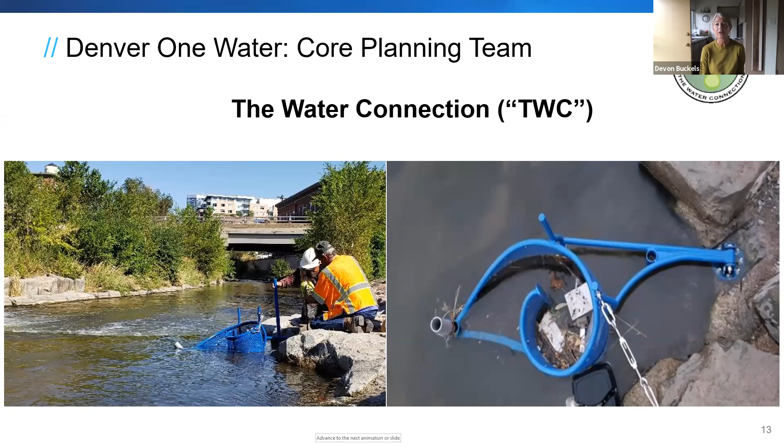Hi everyone, my name's Ty Boreski, and I'm a senior planner at Denver Water. I also want to briefly introduce my colleagues participating in this: Abby Antelovich and Jeff Terrell. Denver Water is the oldest and largest water utility in Colorado.

We provide drinking, recycled, and raw water to over 1.5 million people in the metro area. As an organization, we are always seeking ways to most efficiently use and protect our water supplies, and when it comes to One Water, we want to lead by example. Recently, we've redeveloped our campus, integrating One Water elements such as a decentralized blackwater system, rainwater harvesting, and drought-tolerant, less water-intensive landscaping. We're grateful to be part of this regional initiative with such great partners. Thank you.

And on the next slide, I think we have Brandy from Metro Wastewater.

Hi everyone, I'm Brandy DeLange from Metro Wastewater. Metro is obviously a really critical part of the water cycle here, and we provide wastewater treatment to over 60 municipalities within our Denver metro area, so that's about 2 million people being served. We really see that the One Water project is in alignment with our strategic vision.

And also us being an innovative leader in the wastewater treatment industry, we're very grateful to be a part of this. We see that this really is part of the value and collaborative relationships that we have with all of our stakeholders and partners throughout the water cycle.

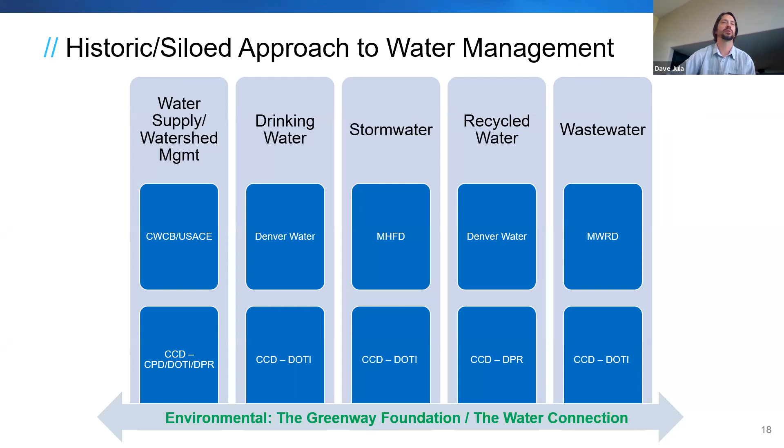So how does One Water look in the Denver metro area, and specifically the city and county of Denver? We talked about all the players. I'll just go around our nice little graphic here. Denver is responsible for stormwater and floodplain management.

Primarily, we do stormwater and sanitary infrastructure responsibilities, the pipes in the streets that you don't see unless they're backed up. And then Metro Wastewater treats our wastewater, the water that goes down your taps and flushes down your toilet.

And then we have Mile High Flood District, which assists the city and other jurisdictions within the region for stormwater and floodplain management. And Denver Water supplies us our potable water and ensures that we have a sustainable water supply.

So these are all the different players that are working together. And then we have people like the Greenway Foundation and the Water Connection that are advocating more regionally and holistically across the area. And so this is how we work in the city.

And then one thing that I've learned, and anybody who has been working with One Water concepts and frameworks and the theory in general, is a lot of people have different definitions of One Water. So we did come up with our own. And this gives you an idea of some of the things, I'm not going to read to you.

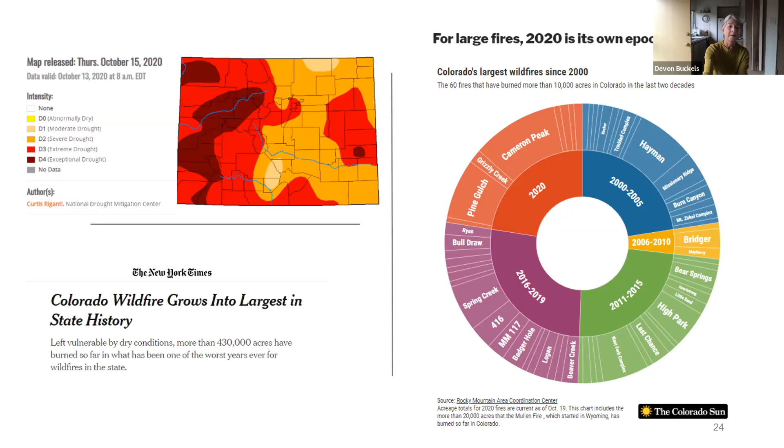We put together a list of some One Water goals, and these are just for context. This isn't necessarily as they're going to appear in the plan. But one of the things we're trying to accomplish is to elevate water's visibility and standing relative to other critical resource areas. Water sometimes is sort of invisible, and as long as it functions, then nobody really talks about it or thinks about it. So we're trying to elevate the conversation around water and watersheds.

We also feel it's important to reduce negative impacts from decisions made in silos, as Dave mentioned. We intend to strengthen relationships for holistic and multi-benefit solutions to water challenges. And this is a great opportunity with all of these different organizations coming together.

We can talk about pivoting from business as usual. It's no longer okay to just say, well, we're going to do it this way because that's how we've always done it. So we're really going to push the envelope a little bit here and challenge each other to think a little differently, and perhaps think as if there is no box in the room.

We also want to support each other and support opportunities for a water resilient future. And through all of that, a goal would be to improve urban livability, equity, and social justice. Because after all, water is not only fundamental, water really is life.

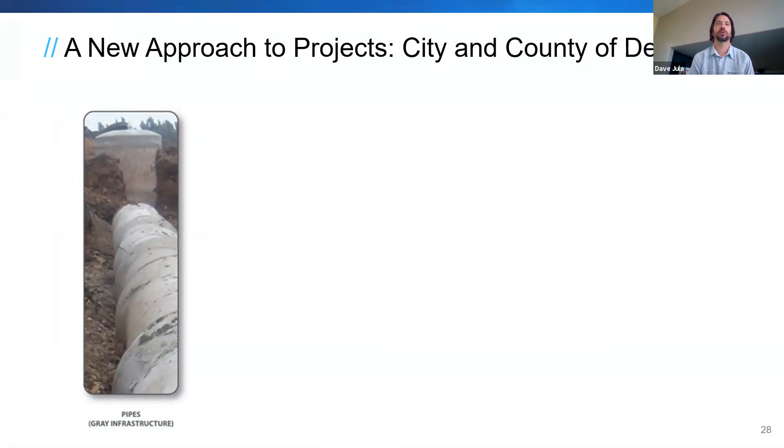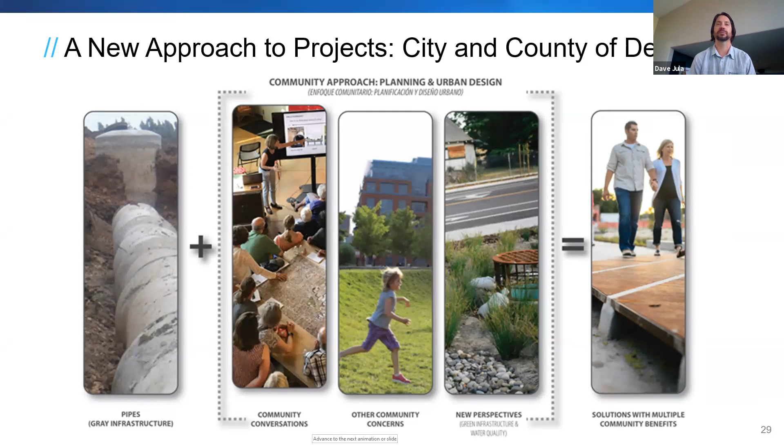Traditionally, at the city, we're really good at focusing on the gray infrastructure. And from a water perspective, that meant pipes, big pipes to convey stormwater from our neighborhoods to our waterways. However, in the last few years, we've really shifted that focus to look more holistically at our projects, work with the community, understand their needs, listen to what they want in their neighborhood, and look for opportunities to introduce green infrastructure to improve water quality, not just manage big storm events. All those things result in multi-benefits to the community we've been talking about. This is really the new way of approaching work.

So how do you specifically fit into this process? We have our core planning team who you've met. We have to brief our executive leadership at our respective agencies. We also have an advisory group, the One Water Advisory Group, made up of industry experts across the board to help us vet ideas and identify challenges early on and potential solutions. But this is your opportunity to engage with us and hear from you on what you want to see in a One Water plan moving forward.

This is the first touch point we're having with you, so we're doing a lot of introductory work here on the concepts, but we will be coming back to you more times, later next month and early next year, as we complete the plan, hopefully by March of next year.

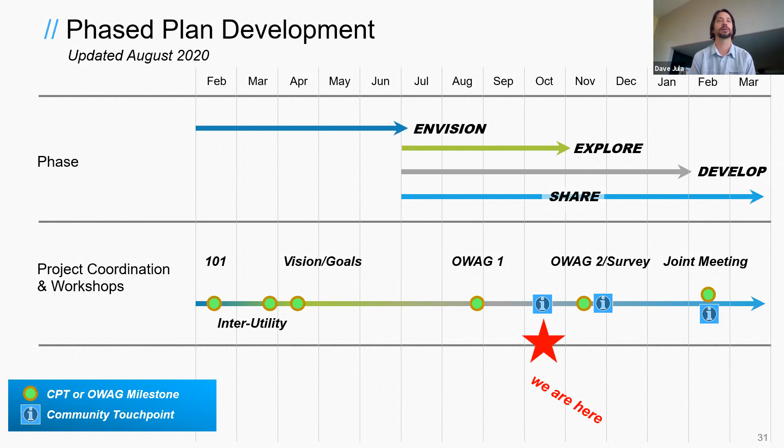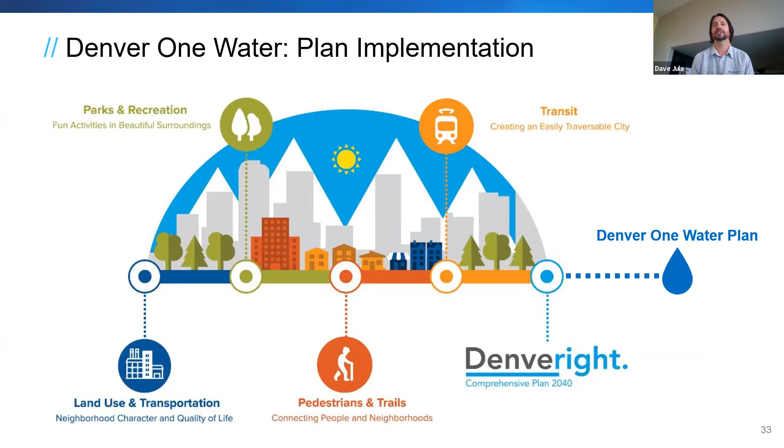Now I'm going to hand it back to Miles for our next question. Thanks, Dave, that's a really good summary on where we've been, where we are, and where we're going, and that this is just one of the first opportunities to get your feedback on what's important. Where does the community see opportunities? Where does the community see challenges? And what questions do you have?

Alex, I know you put it out there on chat - any questions coming in yet? No questions that have come in via chat, and I'm going to take a quick look. I don't see any hands raised yet. Perfect, we'll give you all just a couple more minutes if you have any other chats.

Quick reminder, this is discussion zone number two of five. I'm sure you're all holding your questions for the end - we'll have a final thought and Q&A at the end as well. You probably want to get to the really fun stuff on how do we make this real, and what does a good One Water project look like? What are the criteria that make a project a candidate, and what does that mean for the community, you all at the neighborhood level or even the citywide level, the state or the regional level? So unless, Alex, I've killed enough time to get some questions...

One question is from Christy Wiseman asking, how is equity being integrated into Denver's One Water planning process? The pandemic has highlighted longstanding inequities in access to affordable, reliable, safe drinking water, and in underserved communities not being prioritized for green infrastructure projects. So I think the key question here is how is equity being integrated into Denver One Water's planning process?

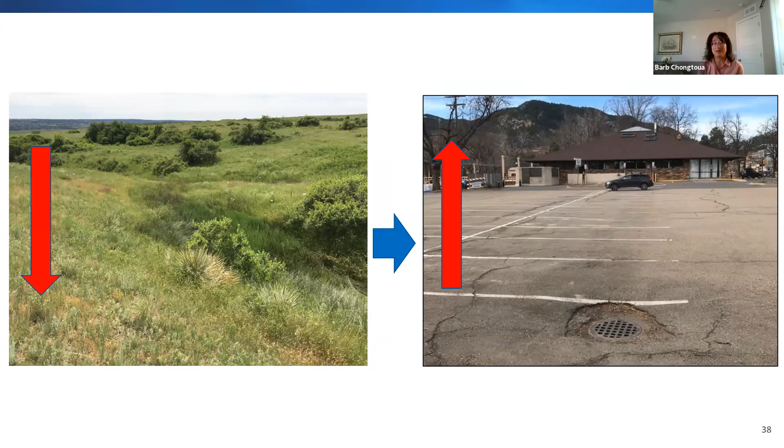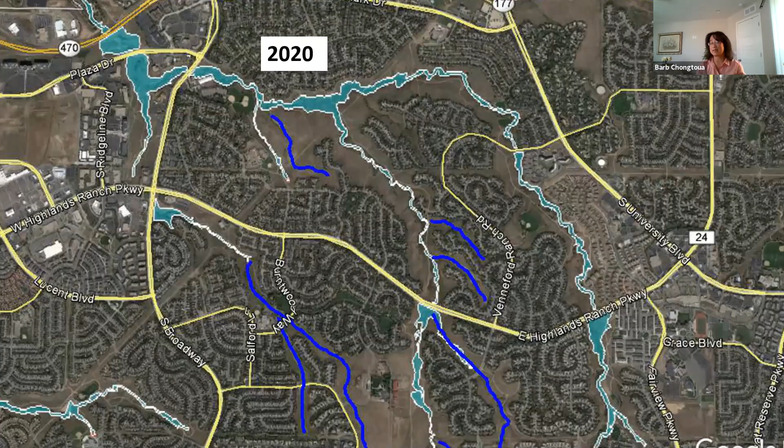Well, you take another area in the metro area shown in this next slide in 1937, and it's very similar to the Denver Tech Center. Keep going to the next slide, and you'll see there's a slight difference in how this developed. This is what it looks like today, and you can move to the next slide for eyes on the ground of what it looks like. You can see here that there was a deliberate effort with development actually embracing these green spaces.

This is an example of what makes a good One Water project. It works for development and it works for everything else we've been talking about all along. Next slide, please.

These really minor changes, simple changes like adding green spaces back in or vegetation, even simply with a parking lot, have a huge impact on its use and benefit to us, and its benefit to wildlife. We might even challenge ourselves to incorporate these simple changes, as you can see on the next slide, to a larger scale, a city scale, say Denver.

But as a good One Water project, why don't we take this opportunity to incorporate good vegetation and good topography in the overbank area so that we now have space for people, but also spaces for wildlife and vegetation. Why not take it one more step as a good One Water project and use the space to also cleanse that water running from the streets and buildings before it gets into the river.

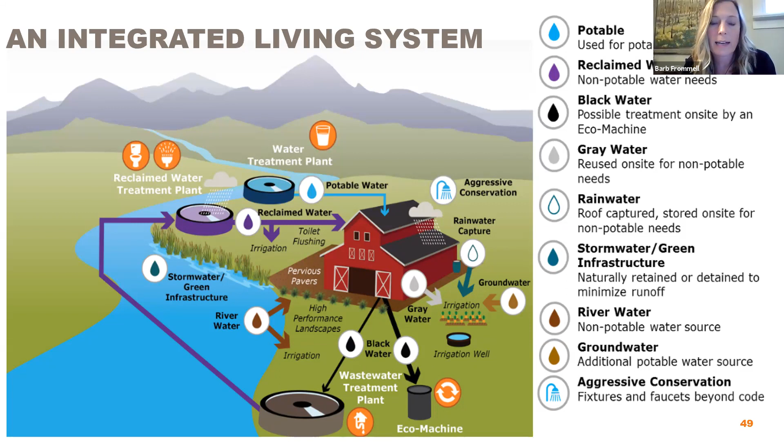We were challenged by our partners, and I'll call out John Zapien specifically, a longtime Globeville resident and National Western Center Authority board member, who challenged us to turn our liabilities into assets. This is a great story and example of how we've been able to do that.

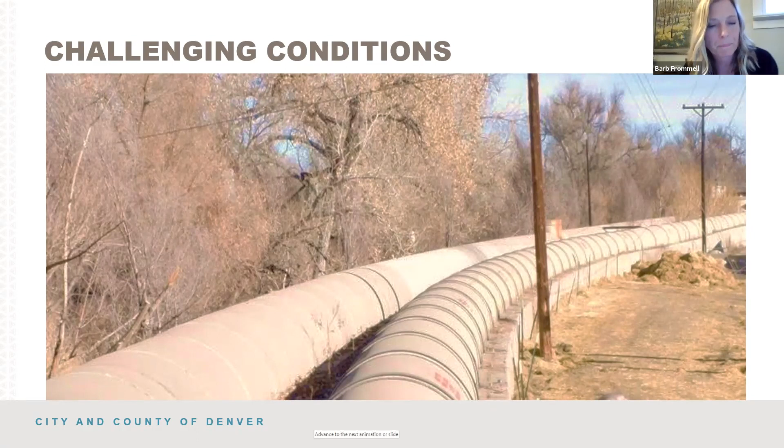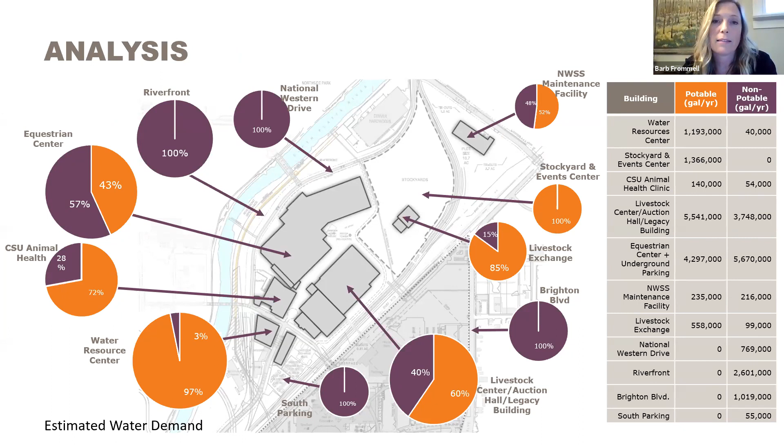The other piece that contributed to our One Water process was analysis. There was a lot of work that went into collaborating on data and projections, such as water demand projections. CSU and Denver Water did a lot of this work, and we've been very appreciative of that. It allowed us to really look at the realities of delivering some of the different solutions to the campus and look at patterns in the data that would help us hone in on what the right solutions are.

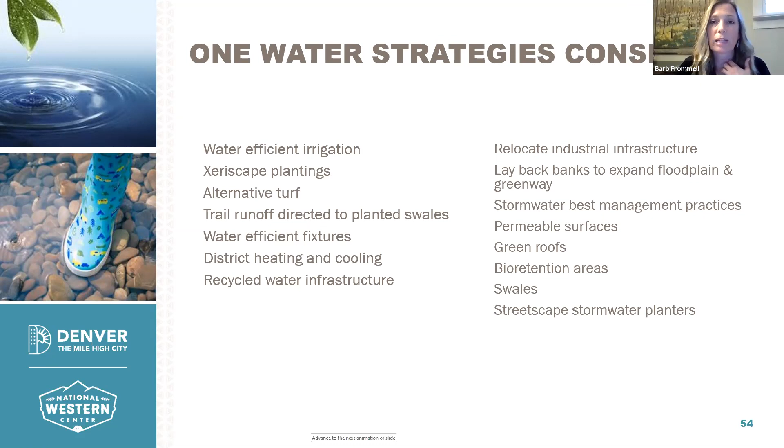I'm going to focus on two areas where I think we've been really successful, and that is the district heating and cooling, and the greenway along the riverfront.

District heating and cooling is a different way of heating and cooling your buildings. Typically, each building would have its heating and cooling as an individual structure, sourced from natural gas. With district heating and cooling, you take a much more efficient approach where you consolidate all of the equipment into a central utility plant.

We source our heating and cooling from the thermal energy in the wastewater in the Delgany pipeline. This has tremendous energy benefits in terms of greenhouse gas reductions on campus, but what we don't talk about as much is the water benefits. By reducing the temperature of the wastewater in the Delgany pipeline, we help Metro Wastewater reduce the temperature of their effluent that goes into the South Platte River. So simply by heating and cooling our buildings this way, we have ecosystem benefits on the South Platte River, a connection you wouldn't normally make.

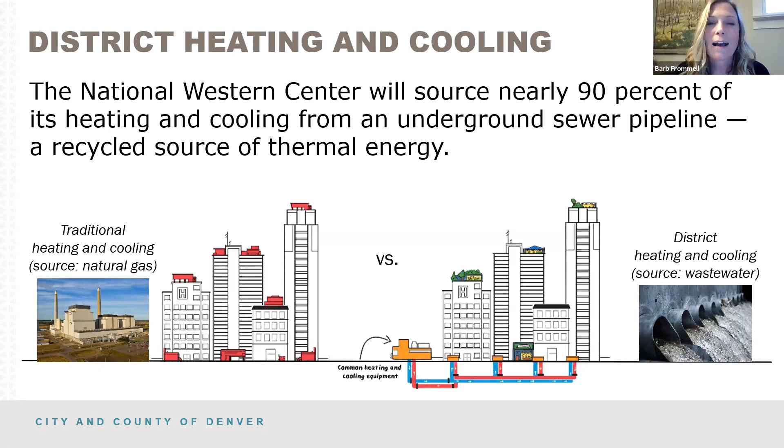The district energy system also allows us to conserve water on the campus. In traditional heating and cooling, every building would have its own cooling towers, and cooling towers in commercial and industrial buildings consume 20 to 30% of a facility's total water use, making them the largest use of water in these buildings, which is largely what we have on campus. In district heating and cooling, those cooling towers aren't located in the buildings; they're centralized in the central utility plant, which is a much more efficient way to heat and cool the buildings.

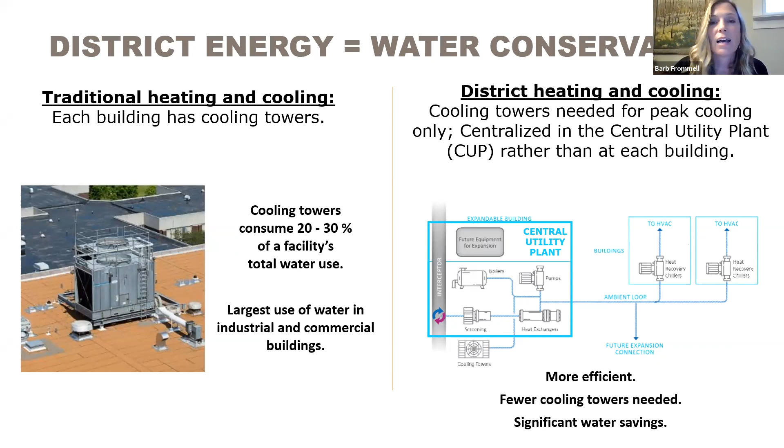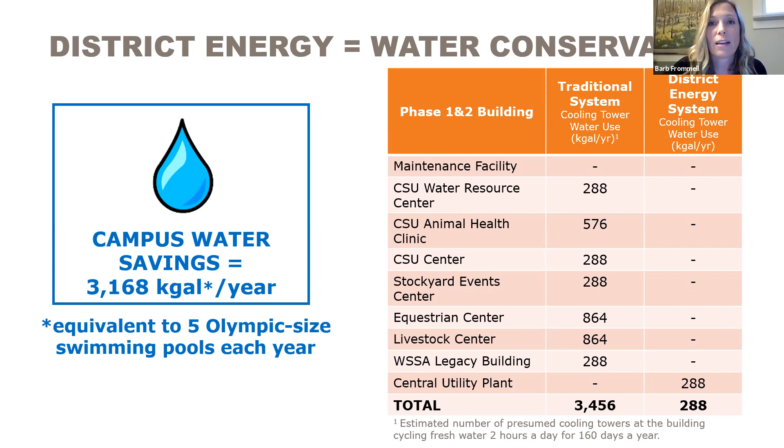We need fewer cooling towers, and we have significant water savings. We've calculated that savings at over 3,000 kilogallons per year, equivalent to 5 Olympic-sized swimming pools each year, simply by taking a district energy approach to heating and cooling our buildings. So we're pretty excited about that.

With the riverfront, one of our first challenges was figuring out how to relocate industrial infrastructure, including the Delgany pipes and freight rail lines. We've worked with Metro Wastewater, a really important partner in this project, to relocate and bury the Delgany pipes away from the river's edge, and we've also been able to relocate the freight rail. This allows for about 6 acres of space along the river.

This is about a half-mile stretch of the South Platte River where we can lay back the banks, widen the floodplain, and offer both water benefits—cleansing the water and slowing it down before it enters the river—and recreational opportunities. In designing this open space, we challenged our design teams to bring in as much green infrastructure and as many one-water elements as possible.

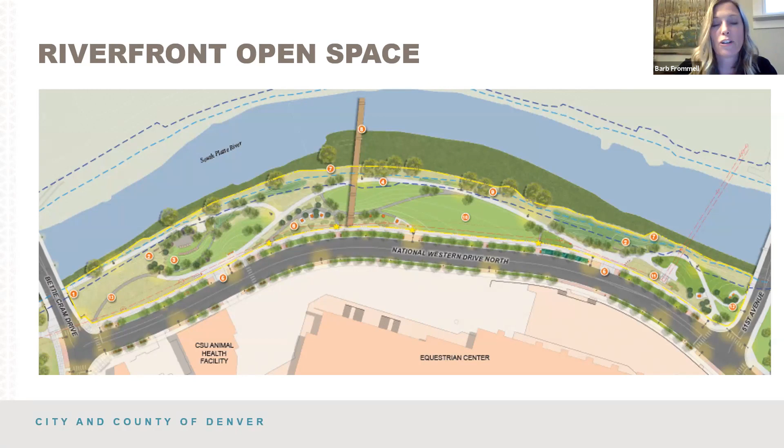They've put in water-efficient irrigation, drought-tolerant landscaping, and things like alternative turf and pollinator lawns, which have ecosystem benefits as well as recreational benefits for surrounding communities and visitors.

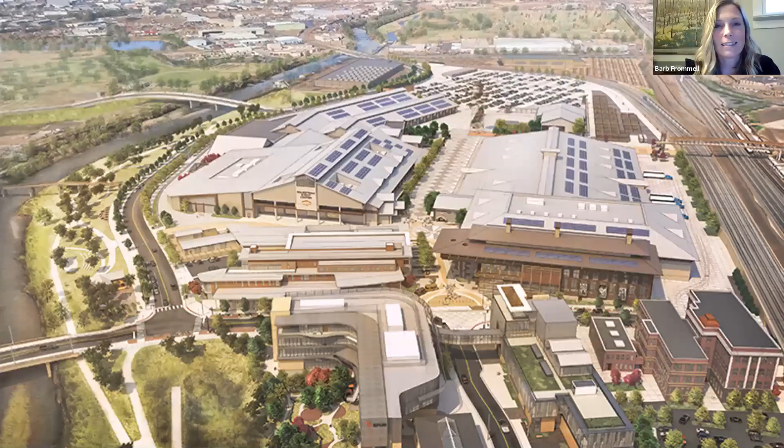The last couple of slides are just renderings of what the campus will look like when completed. It's a couple years away, but if you go out to the site, you'll see construction is underway—it's happening, and we're really excited to see these changes in place. These are a couple of shots of what the new riverfront will look like once these amenities are built.

Barb and Brad, that's great—you just summarized so much information in such a short time. I'm sure we've got lots of good Q&A, and what really sticks out in my mind is when you can turn those essential infrastructure assets into true community assets. It blows my mind that 90% of the heating and cooling comes from the interceptor, the sewer interceptor that runs through there. It's amazing. So with that, Alex, what questions did we get from the community during that mini case study on One Water here in Denver at National Western Center?